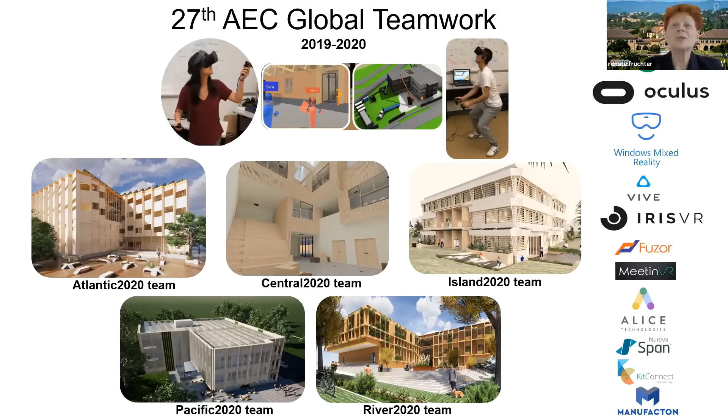All right, hello everyone. We are Team Central, and we are happy to be back on screen today showing you our new engineering facility building for the University of California in Los Angeles. First, let's introduce the main actors. Our team consists of Madeline, Anders, Kilian, Mo, Wenji, and myself, Thomas. And our owners are Vikash, Boris, Korish, Sohan, and of course our CEO and super owner, Renate.

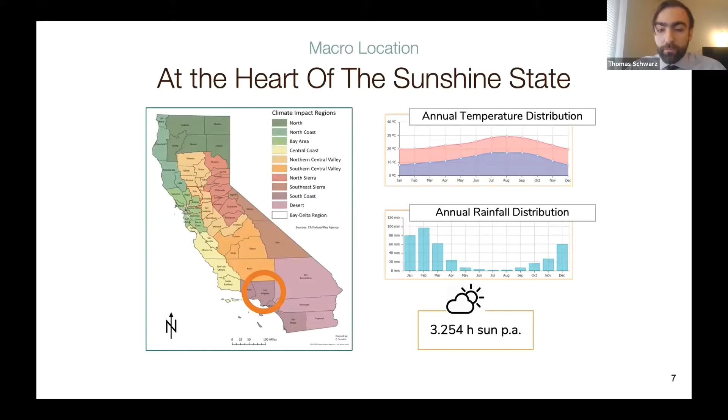Starting with the set of our production: our story takes place on the campus of UCLA in the heart of Los Angeles, California. Located in Southern California, the LA area has a year-round hot and dry climate. Rainfall is scarce, with virtually none over the summer.

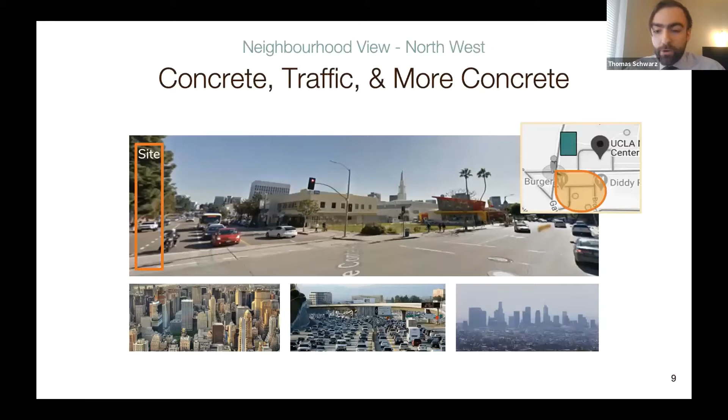Our site represents the southwestern entrance to the UCLA campus, surrounded by residential areas to the west, commercial areas to the south, and a hospital in the direct neighborhood to the east side.

Further investigation shows the very gray concrete surroundings of the site, along with the very busy traffic characteristic of Los Angeles. Considering the site characteristics, a resilient design from the engineers was required to account for the challenges of a high seismic zone, the Santa Ana winds, and water shortages resulting from the hot and dry climate. A tight site, noise-sensitive neighborhood, and busy traffic patterns were obstacles for the construction managers to overcome.

The urban concrete surroundings were actually seen as an opportunity to exploit by the architect, as the team aimed to produce an iconic building that stood out at our owner's request. In the winter quarter, we developed two big ideas, the palm tree and the cradle, aiming to integrate disciplines, build sustainably, and meet owner preferences. A combined team and owner voting resulted in choosing the cradle design with a timber structure, which scored high in environmental sustainability and architectural design.

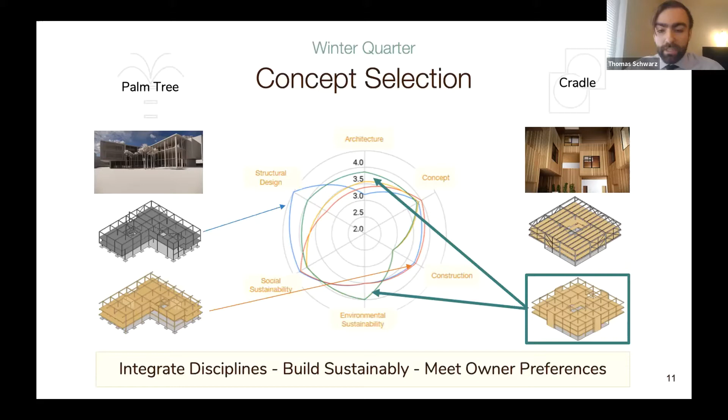Time to get excited for the cradle.

The chosen concept addresses one of the biggest challenges of our present and future. Massive amounts of waste produced by excessive consumption and linear material use is resulting in unfavorable conditions for both planet and people, and puts our future in danger.

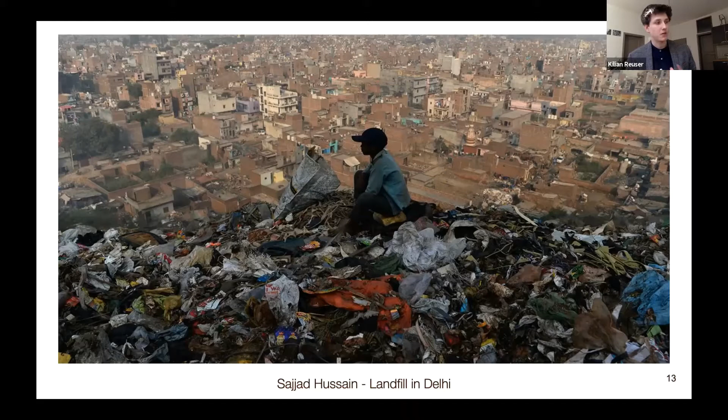There's no choice but to reconsider our actions, big and small. With this concept, we aim to contribute to challenging linear thinking for the sake of humans and nature. Our big idea of the cradle is to design and plan a building that reconnects people and planet, focusing on the needs of users while moving from linear material use to circular thinking, ensuring that our building is prepared for the future and its challenges, and offers an attractive learning environment at UCLA.

This year's challenges have helped us further refine the big idea and adapt different perspectives to user well-being and circularity. Designing for resilience addresses both the building, the integration of the occupants, and resource efficiency in circular construction to be prepared for future changes and challenges. We assessed how prefabrication could help us deliver a high-quality circular building, and integrated different softwares and processes to back up our design choices with more informed and quicker decisions.

With this said, welcome to the cradle.

The cradle presents itself as an introverted building, blending in with the color scheme of the surroundings, while at the same time attracting public and students with its playful facade scheme.

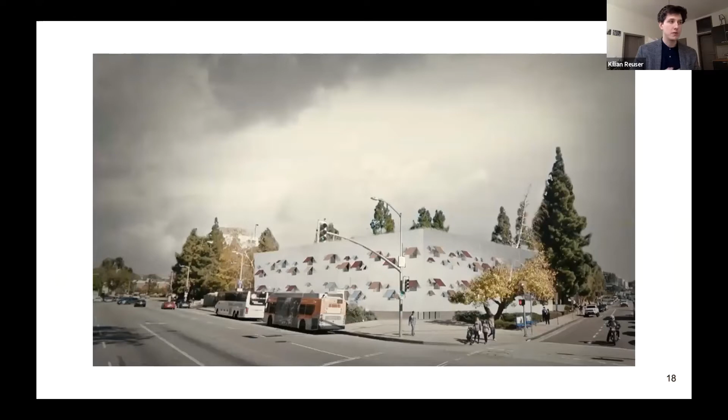Being located at the edge of the campus, the building orientation and concept design was guided by the flow of people and the innate ability of the double square footprint to have a central meeting space.

We wanted to create a welcoming meeting point both inside and outside the building, featuring a big atrium and a green plaza around the building. The plaza is a much needed green area, contrasting the concrete surroundings, placing the cradle in a welcoming, inviting setting.

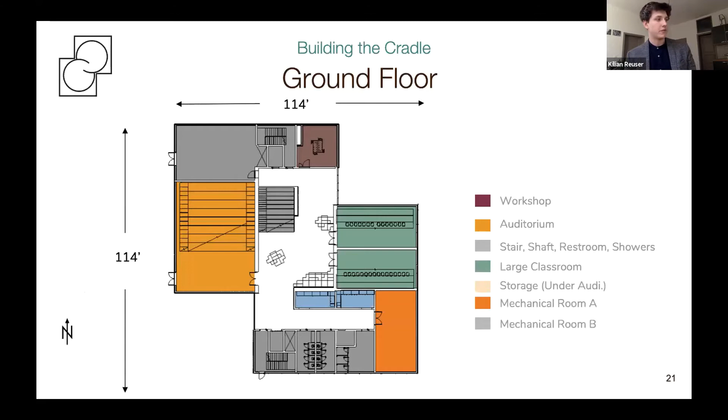Upon entering the building, visitors and students find themselves in the big atrium on the ground floor, from where they can also access the auditorium and two big classrooms.

The building truly opens up from the inside, creating a homely feeling for students, staff, and visitors, reminiscent of a small village. It inspires interaction and innovation through visual connectivity, forming a kind of internal village of different levels, and makes a bold design statement with the cantilevered study spaces on the upper floors.

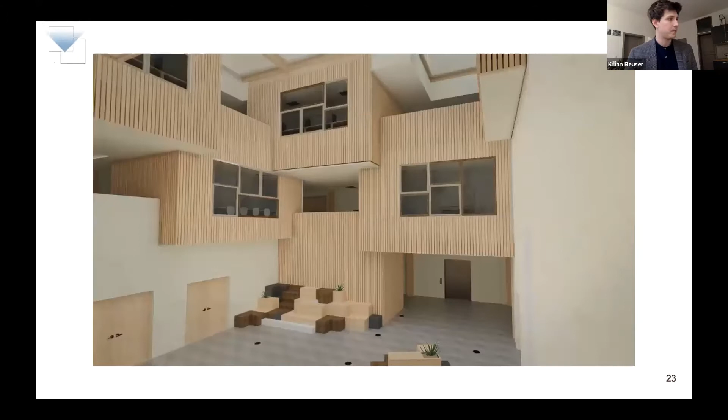The atrium is designed for acquisition and appropriation, inviting occupants to make the space their own with flexible furniture. It also showcases circularity in a very tangible way, using recycled or renewable materials such as newspaper wood or recycled windows on the cantilevers.

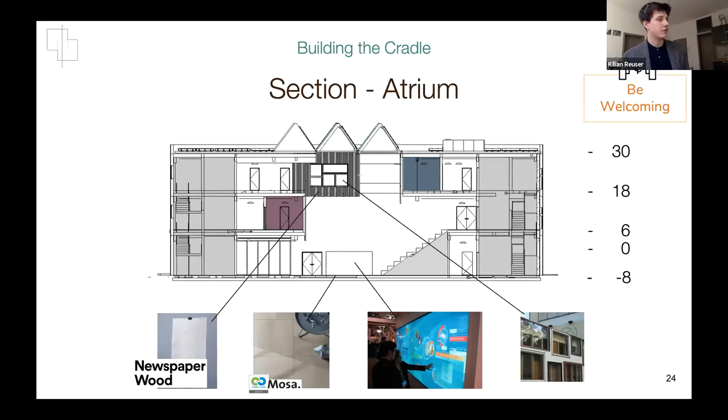Engaging discussions about building performance and circular energy usage through an interactive smart wall is also part of the atrium. The smart wall informs users of our current resource consumption in the building and the latest circularity research findings. The second biggest entity next to the atrium is the auditorium, spanning two floors, since the aim of circularity demanded as little concrete usage as possible.

The backside of the auditorium on the first floor can be separated by a moving wall, allowing flexible use of the space, whether as part of the auditorium or as a classroom. The first floor in general accommodates learning spaces such as classrooms and seminar rooms.

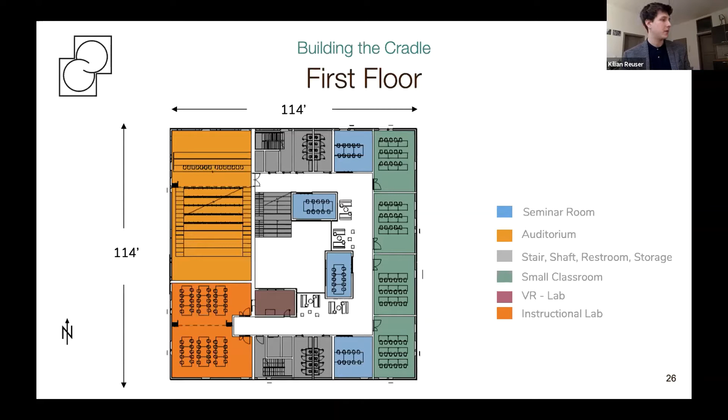On the upper floors, we additionally understand the corridor as an opportunity to foster collaboration and exchange in the student body. We therefore include breakout spaces that look into the atrium, not only providing visual connectivity throughout the building, but also a stellar view into the iconic atrium.

On the second floor, we accommodate more faculty and staff, providing a more work-like and quieter ambience. Here also the breakout spaces underneath the skylight form an interesting play with the corridors and niches for interaction and collaboration.

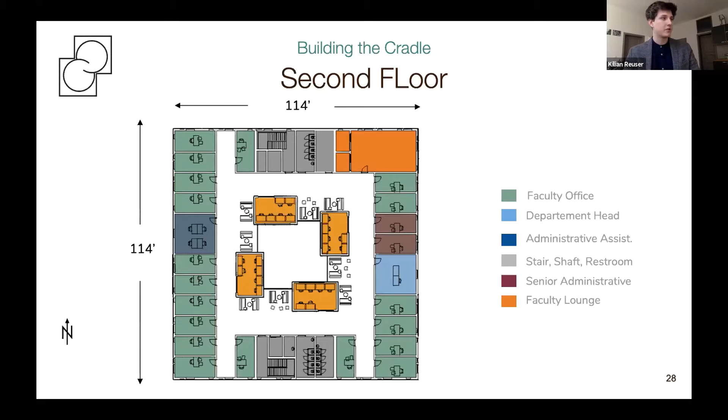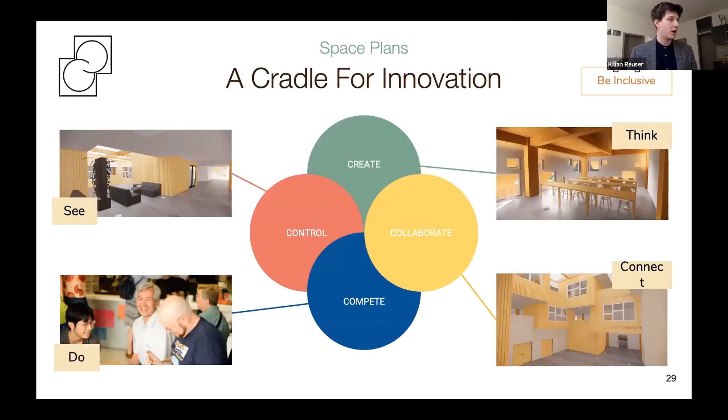With its concept, the cradle is truly inclusive, providing learning and workspaces for all different kinds of personalities. Whether a student or staff member feels more comfortable in personal interaction with others or needs quiet learning spaces, any option can be found in the building.

Beyond the learning spaces, the building engages occupants to contribute more to circular thinking, for example by participating in a workshop in a repair room on the ground floor, or an interactive playful waste collection system on the site.

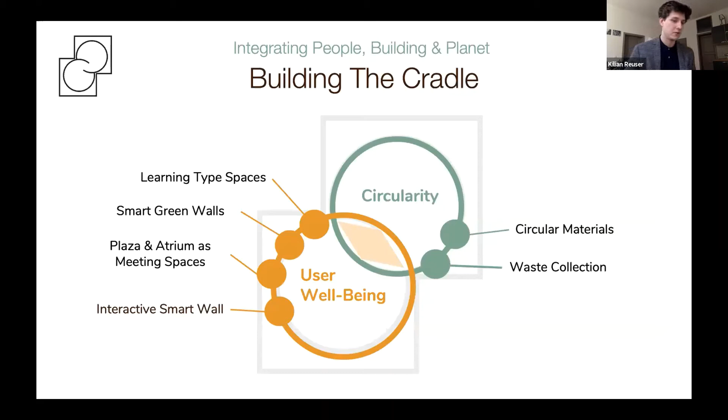Overall, the architectural design provides different spaces for an optimal learning and working experience, realized in a resource-efficient way with innovative materials. Now on to the structure of the cradle.

Together with the architectural vision, the seismic activities in the LA area were key drivers of our structural system design. Using ASCE 7-16 and USGS, site parameters were investigated and it was determined that the seismic design category is Category D. With these determinations, we were able to define the design response spectrum as shown on the slide.

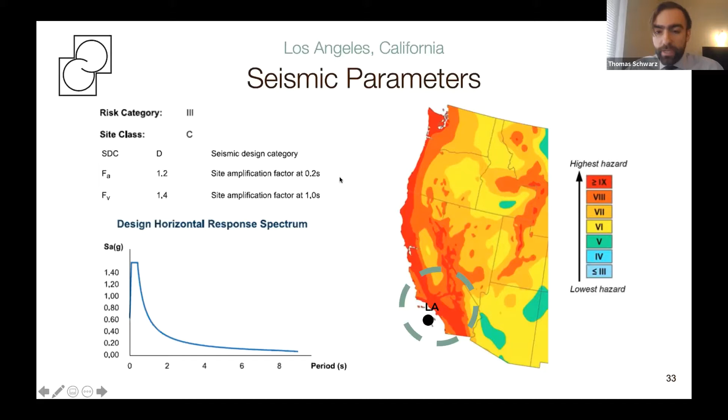Engineered timber was selected as the main structural material to achieve goals of sustainability for its low embodied carbon and prefabricability for its lightweight properties. The framing system for gravity loads consists of CLT panels supported by glulam beams and columns, which transfer the load to a reinforced concrete substructure. The lateral resisting system consists of CLT rocking walls, a resilient design which will be explained in detail later. For support of the cantilevered areas, steel timber truss systems were selected.

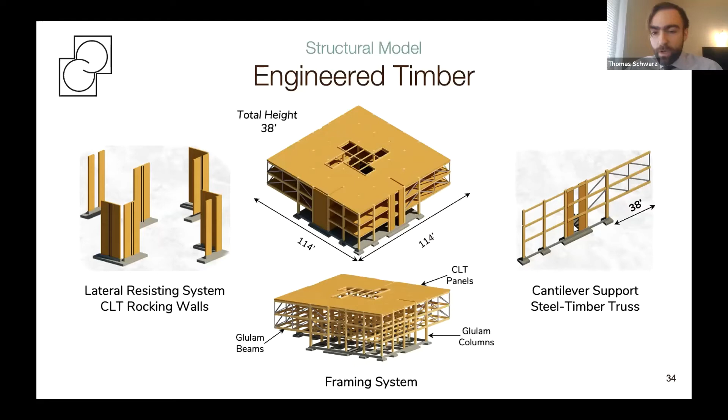Using the determined design live loads, RFEM was used to design and check cross-section capacity of both timber and steel members.

Looking at the framing plan, the building's substructure consists of a 6-inch concrete slab on grade with isolated footings. For the first floor, the framing consists of glulam columns and girders following a regular 19-foot by 19-foot grid with intermediate glulam beams mid-span the girders.

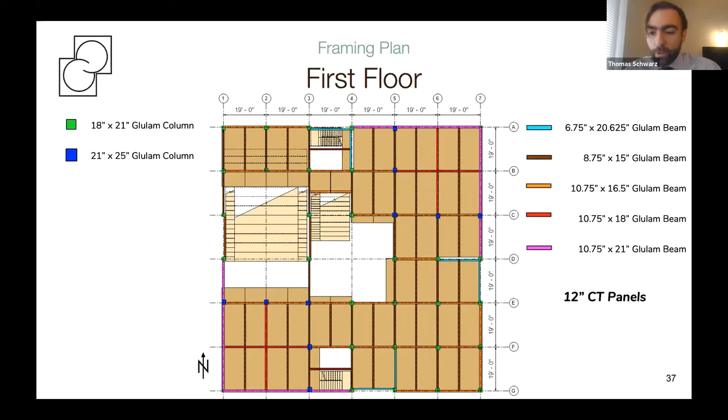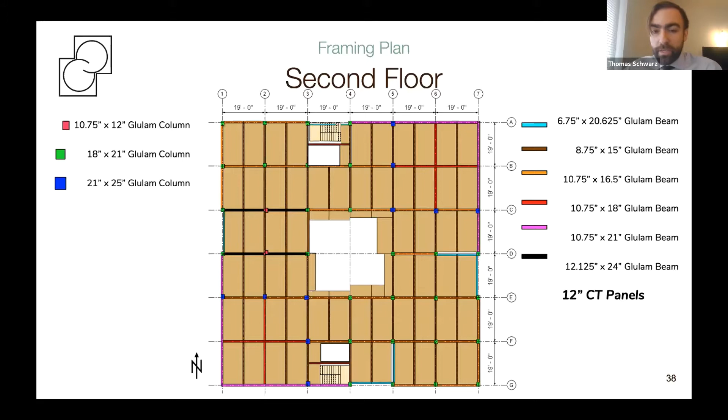The second floor follows the same grid and arrangement, however with deeper and wider girders above the auditorium to accommodate the longer span. The framing of the roof consists of thinner beams of less depth to optimize material use, since live loads do not apply to this level as they do on the first and second floor.

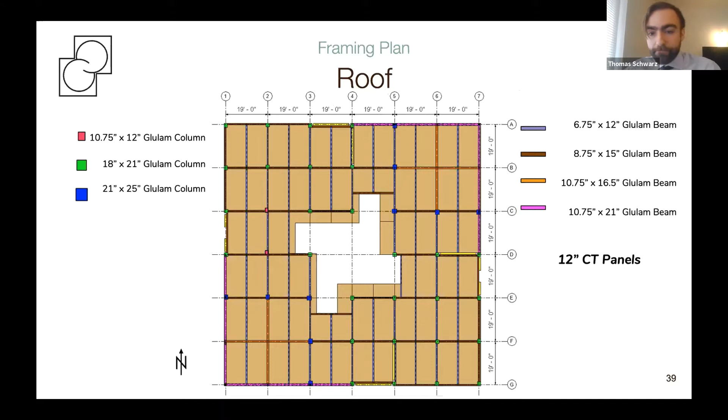RFEM was used to verify the cross-section capacity of the steel truss supports and the serviceability of the cantilevered areas. Using HSS 8x8x3/8 steel members for the truss, we were able to achieve an impressive acceptable maximum deflection of about half that of the allowable.

To support easy disassembly without compromising structural integrity, we opted for bolted connections rather than welded for both steel and steel-timber connections within the cantilevers.

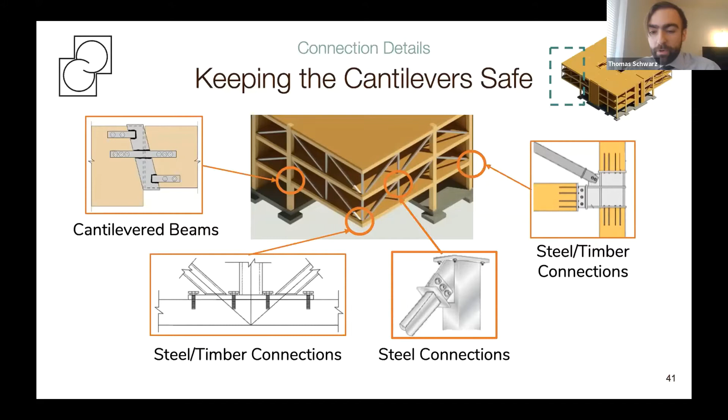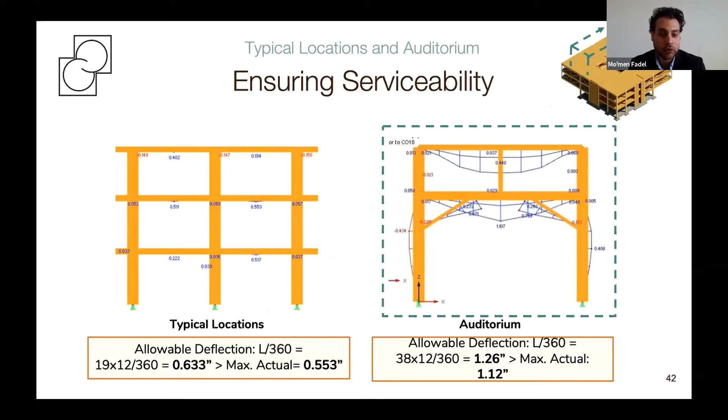Cross-section capacity and serviceability were verified for all timber members. Diagonal supports were added in the auditorium to decrease beam depth, ensuring views from the back rows were not obstructed.

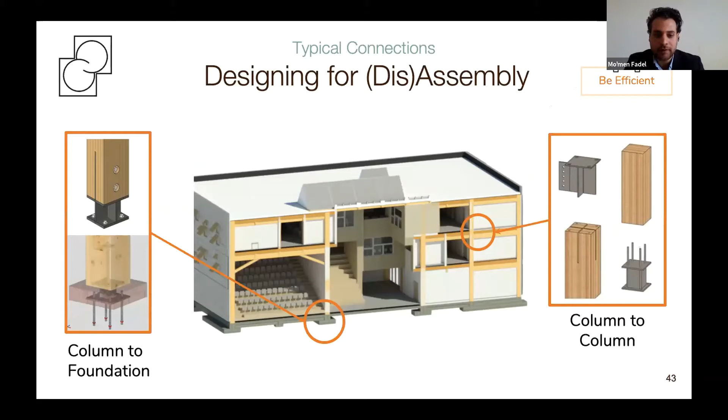Following the idea behind cantilever connections, typical connections between different elements were chosen to be easily assembled and disassembled to support the circularity and cradle-to-cradle concept behind the design.

To ensure the safety of the building during earthquake events, ETABS was used to define all the relevant seismic parameters, considering both the design basis and maximum considered earthquake.

The deformation is limited to the fuses rather than the frame, which can be easily replaced after a seismic event.

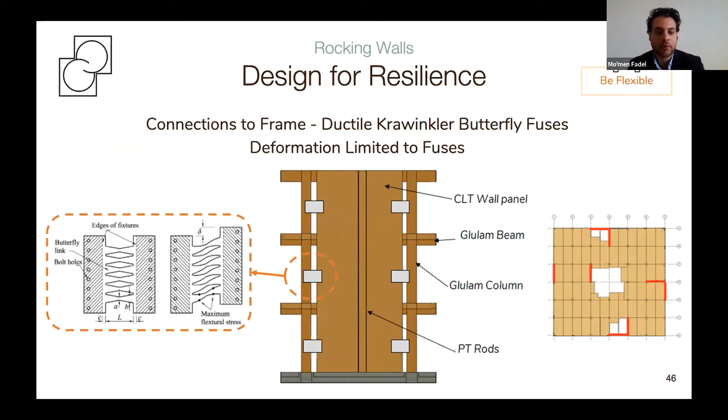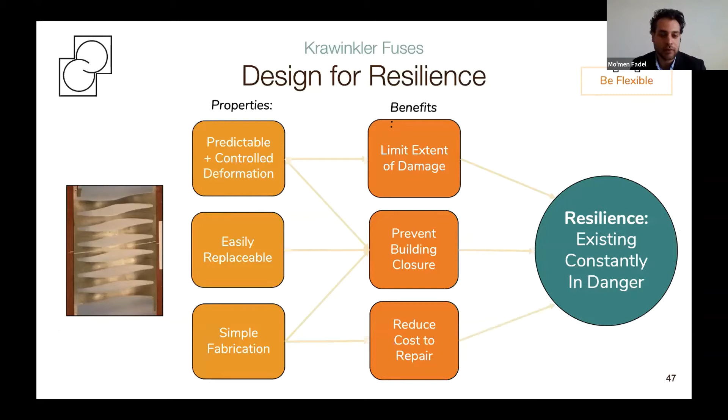Krawinkler fuses support resilience in our structure design, as they can be explained in three major features: deformation control, easy replaceability after damage, and simple fabrication. These mentioned features help in limiting the extent of damage, preventing building closure, and consequently reducing the cost of repair. These benefits all support the idea of resilience.

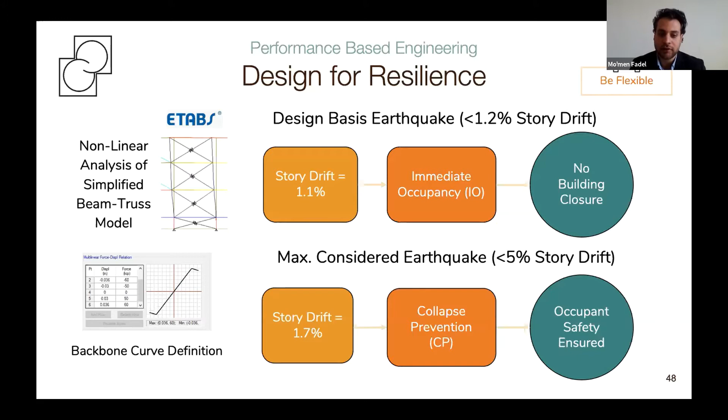In terms of performance-based engineering, rocking walls with Krawinkler fuses were tested in ETABS nonlinear analysis through a simplified beam truss model. Testing for a design basis earthquake, immediate occupancy criteria was met, meaning the building would not require closure after such an event. Testing for maximum considered earthquake, collapse prevention criteria was readily met, ensuring the safety of occupants in such an event.

Revisiting the big ideas behind the concept, earthquake resilient design ensures user well-being at any time. Timber materials and bolted connections designed for disassembly support circularity.

From the MEP perspective, we looked into making the energy and water supply more circular and designed an efficient, adaptable ventilation system that reduces energy consumption while also increasing user control and well-being.

The energy for the building will be produced by solar panels on the roof and skylights. The cradle works as a microgrid concept with large flow batteries that can provide power when there is no production from the PV panels. It also allows for maintaining electricity for essential needs of the building for an entire week in case of an electricity failure.

As a backup, the microgrid is connected to the UCLA grid.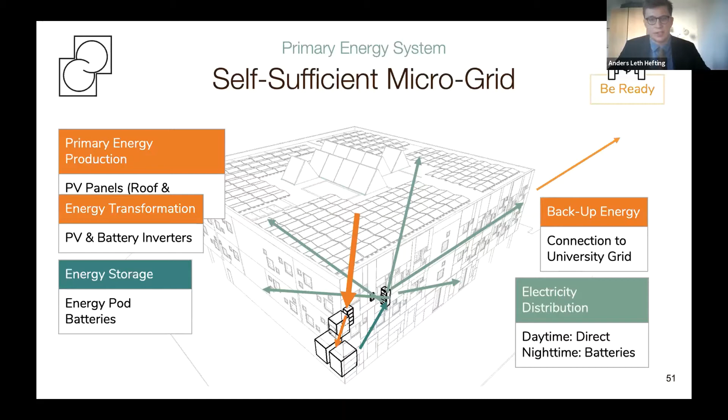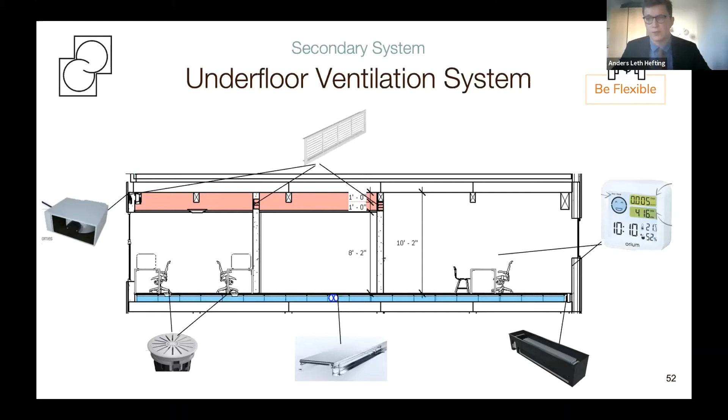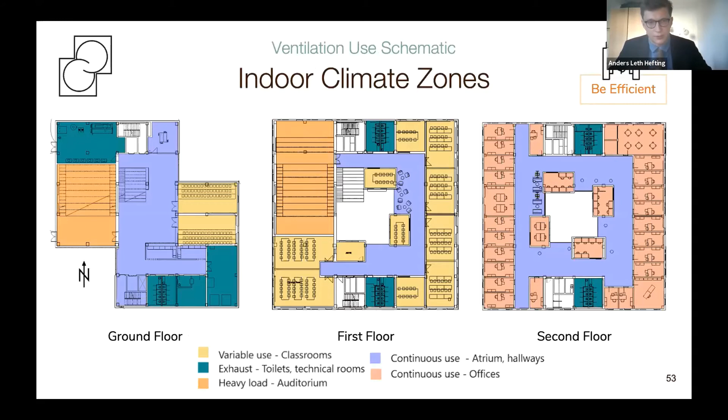The MEP and electric utilities rooms are located at the ground floor level in the northeast and southeast corners. The atrium and classrooms are ventilated actively along the building envelope and passively by dampers in the center.

On the second floor, the underfloor supply is ducted with outlet dampers into each classroom and meeting room to enable local control where needed. The perimeter is conditioned by convection units.

On the third floor, the supply plenum is not subdivided and it has a constant low air pressure throughout the underfloor. The supply air into the perimeter offices is controlled by the convection terminal units, which can cool and heat air locally as desired by office occupants.

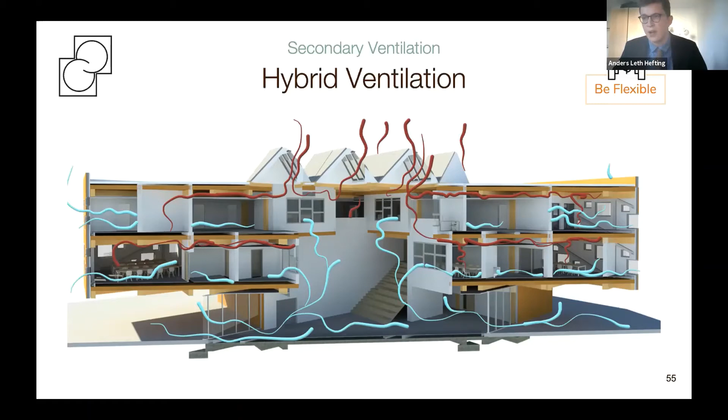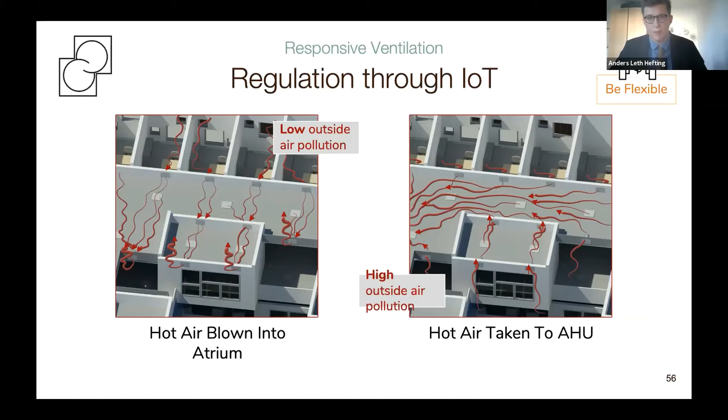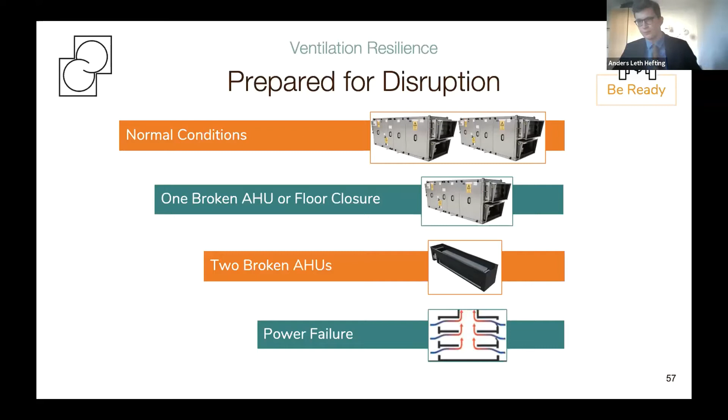The service design hence enables both circular use of resources and energy, as well as a high degree of occupant control and a system that is able to respond to different scenarios.

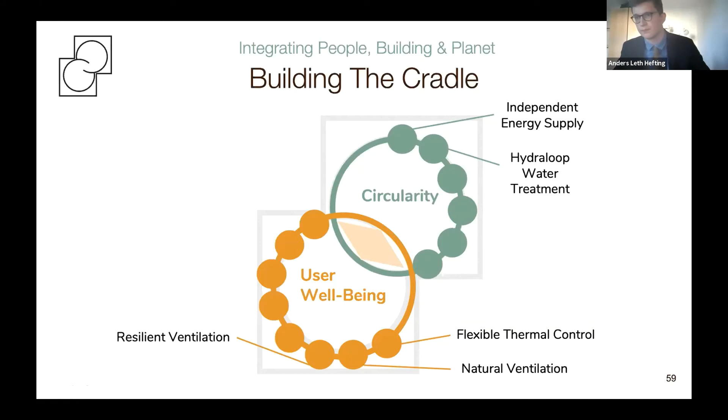The individual solutions were all guided by the pursuit of circularity and user well-being, but only the integration of different disciplines allowed us to truly take this ambition to the next level. A lot of team effort was focused on the facade and the atrium, creating an inviting, iconic building from the inside and outside, and we will look into these considerations more in detail in the following.

How do we propose an iconic facade solution? The design of the facade was characterized by several iterations to balance structural safety and architectural design. The construction managers also had a say in the design process, pushing for high standardization to enable prefabrication and disassembly, a shorter construction process, and cost-efficient circular material choice. On top of that, an efficient, simple shading solution had to be found.

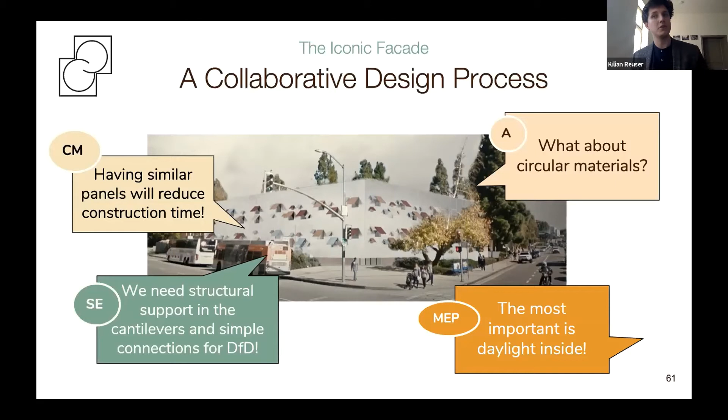Awnings from recycled sails are a material-effective shading solution. It is traditional, but allows for individual operation for each window to provide the desired daylight amount for each room. The awning solution was examined using Iris VR, and only a small amount of the low winter sunlight enters the southeast-facing classroom at both 9 a.m. and 3 p.m.

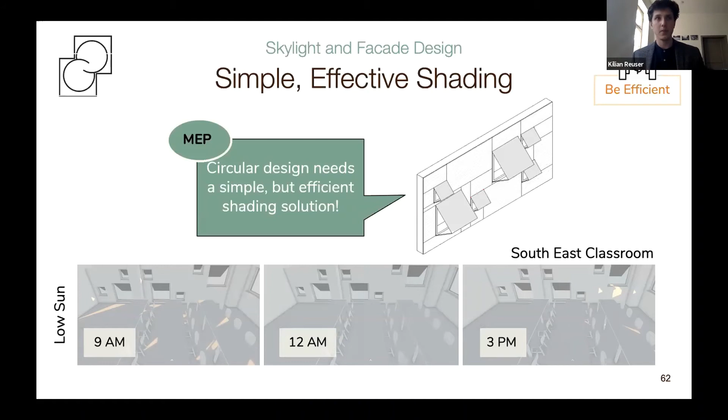The result of these cross-disciplinary efforts were 5 different facade patterns, which still make up a playful, interesting facade pattern, but at the same time enable a learning curve for efficient installation as well as easy disassembly.

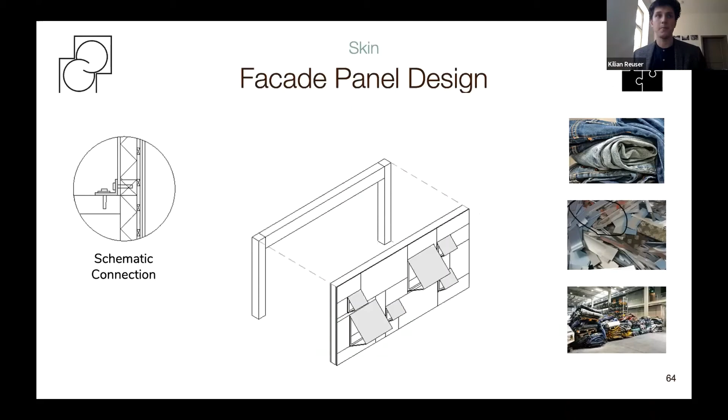The disassembly of the facade is further supported by the design of connection details that connect the panels to the structural frame using screws. A big factor to determine the level of circularity was the facade material. Finally, we chose recycled aluminum, which has outstanding appearance, good thermal properties, and isn't too expensive.

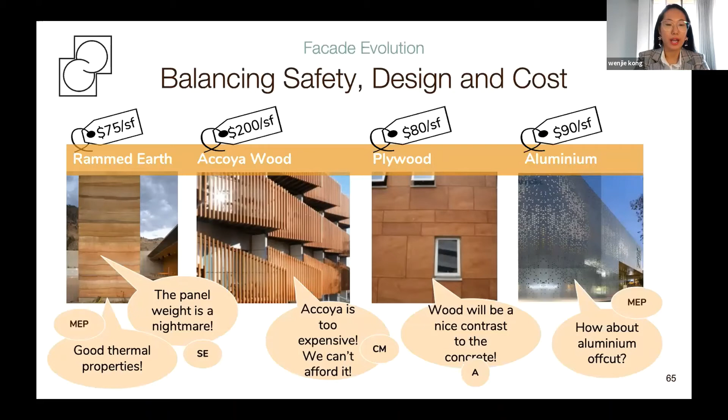Having determined the layout of the panels, we evaluated the construction process. The biggest facade panels are about 20 feet long and 11 feet wide, since the most prevalent truck width is under 12 feet. This is the heaviest architectural element, thus it determines our mobile crane capacity. Here is the just-in-time delivery and installation process for our facade panels.

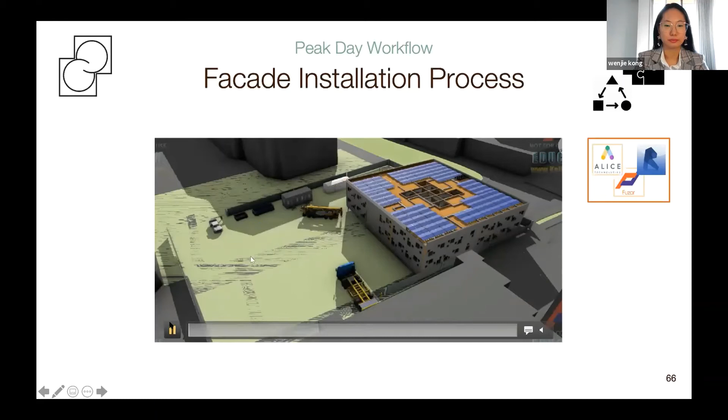Here is the KPI diagram for facade panel installation, including truck unloading the panels to the material laydown area. The upper control limit is 60 minutes, and the average installation time is 46 minutes. Thus, we can install 8 panels per day, and the facade installation will take 3 days per floor.

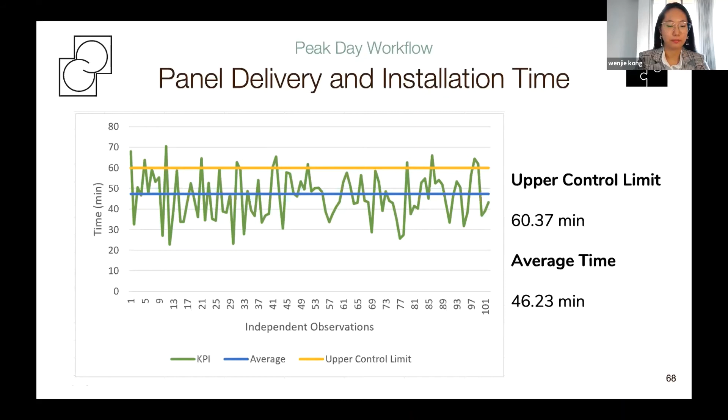Overall, the facade plays a key role in achieving our big idea implementation.

The focus of discussions was the atrium, our key design feature on the inside. Creating an inviting meeting space for occupants and visitors in and around the atrium is a central part of the user well-being goal. Realizing the architectural design has particularly affected two areas: skylight design driven by the MEP and SE engineers, and the construction of the cantilever learning space on the upper floors driven by the construction managers.

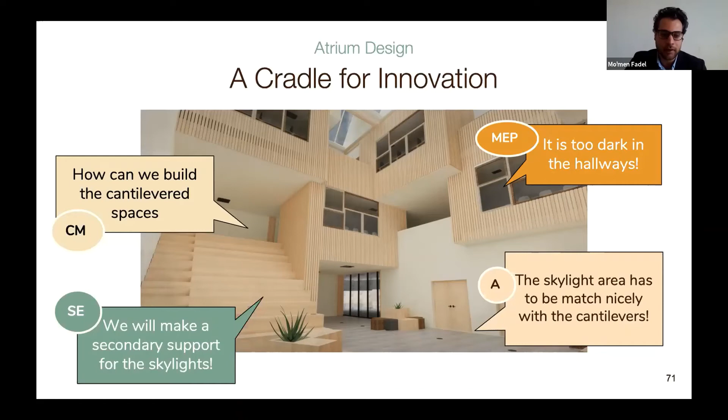The initial skylight design following the standardized grid wasn't very pleasing from a design perspective, and also resulted in a lot of areas with insufficient daylight on the upper floor.

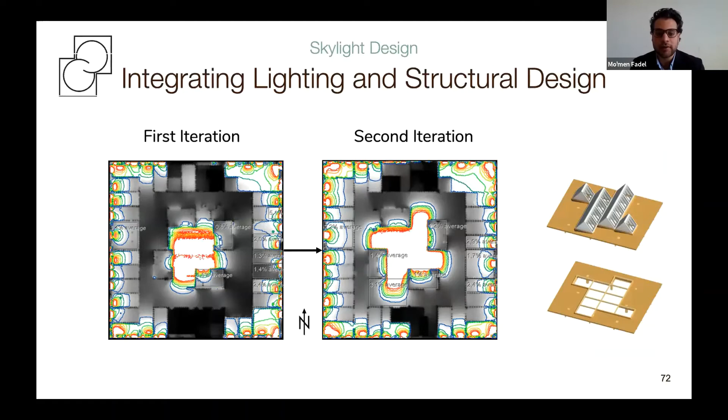Elevating a skylight support structure above the rest of the roof frame enables the skylight to be placed centrally in the atrium, wrapping around the boxes into the breakout zones. This provides twice the amount of daylighting for the interior boxes and hallway spaces.

Madeleine, I believe you're muted.

Sorry. To bring the atrium to life, the construction strategy also had to be evaluated, with a particular focus on the cantilevered spaces. While the owners are mostly interested in getting a high-quality building on time and budget, the construction managers saw a number of risks and challenges that need to be mitigated to achieve these goals.

In order to get a better understanding and an overview of the potential risks, we created a risk matrix with the team, brainstorming questions such as what can happen, when can it happen, and why? Who is going to be affected and for whom is it a risk? Then for several building parts like the facade and the atrium cantilevers, we looked into how prefabrication could help us handle the risks in order to avoid safety and logistics issues and save cost and time.

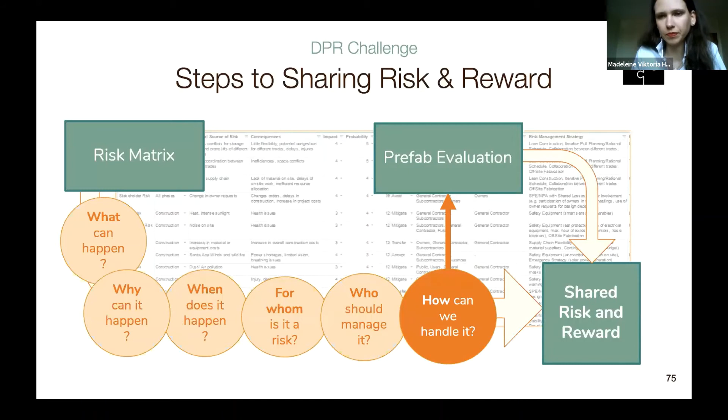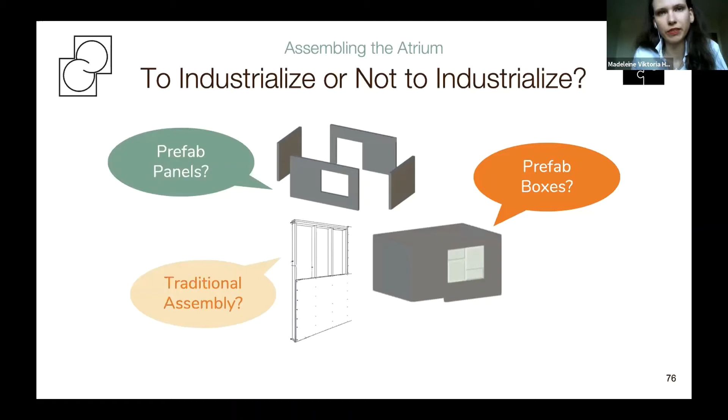For the atrium cantilevers, we looked into three different solutions: traditional assembly, prefab panels, and prefab boxes. There are several logistics and safety risks related to this construction process, affecting a range of stakeholders that all share an interest in mitigating them.

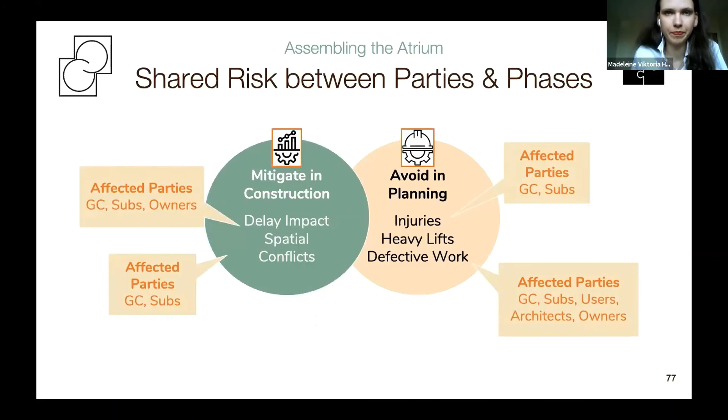Looking into safety first, the goal here is to avoid injuries, heavy lifts, and defective work. We evaluated the work steps that need to be performed on site and the component dimensions. While the traditional assembly poses the highest risk in terms of injury and defective work, the prefab boxes are rather heavy and big elements that need to be lifted.

The prefab boxes also require a larger truck that will come with additional costs and transport safety implications. From the safety perspective, the panels hence seem to be the preferred option.

Going deeper into logistics risk, we also wondered how the sequencing and installation time would affect the risks of delay and spatial conflicts. While single elements and panels can be installed during interior works in parallel with other tasks, prefab boxes will need to be installed during the structural erections.

Using prefab panels allows us to better use the crews on site and reduces the risk of schedule impacts in case of material delivery or construction delays.

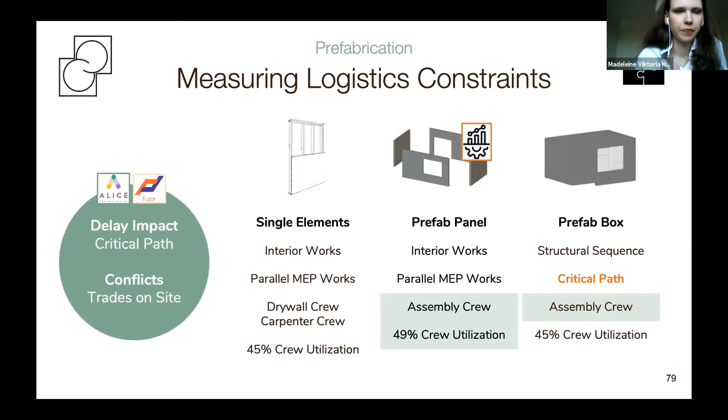But what are the rewards of the different solutions in terms of time, schedule, and quality? Using different models and analyses to assess the options, it is suggested that the prefab boxes will be the most time and cost-efficient solution. However, installing them during the structural sequence leaves the sensitive newspaper wood cladding that we chose exposed to pollution and sun.

Therefore, to ensure high quality without changing materials, it seems not advisable to opt for the prefab box solution. We decided to choose prefab panels and instead looked into how we could improve the baseline schedule that we use for comparison.

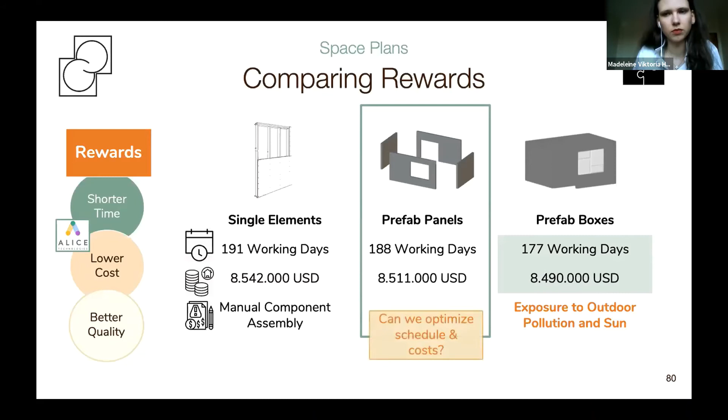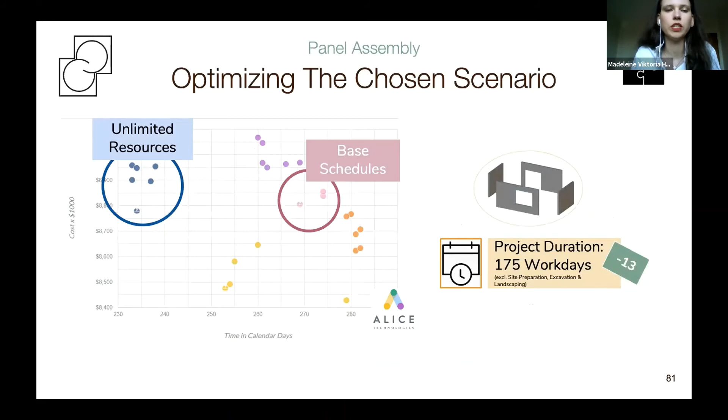Adjusting the crew sizes in the interior work sequence, we were able to shorten the estimated construction time by 13 days while simultaneously reducing the costs. With these collaborative effects, the atrium makes up a true center of user well-being and circularity in the cradle as well.

Then, how can we construct this truly iconic building safely and efficiently? Our answer is always safety first. Our construction planning was guided by safety considerations to provide a safe workspace without disrupting the public. We used the risk matrix mentioned earlier to design a safety concept, addressing both the daily safety measures on site

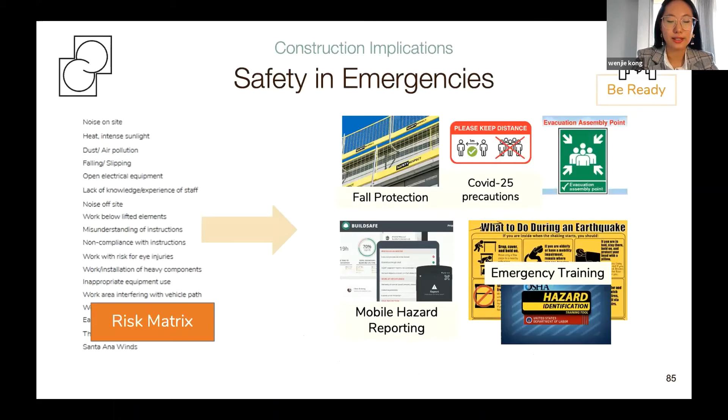as well as the responses to emergencies and challenges such as the COVID-19 pandemic. Planning the site logistics, our main entrance and exit for heavy transport is on the west side to avoid the noise impact on the hospital to the east. In addition, we'll use a noise blocking wall as our temporary fencing.

Since our site is very tight, we'll rent additional site offices across the street and use the visitor parking lot to the north side. In response to the COVID-19 crisis, we placed a hand washing station along with a site trailer and toilet on the east side.

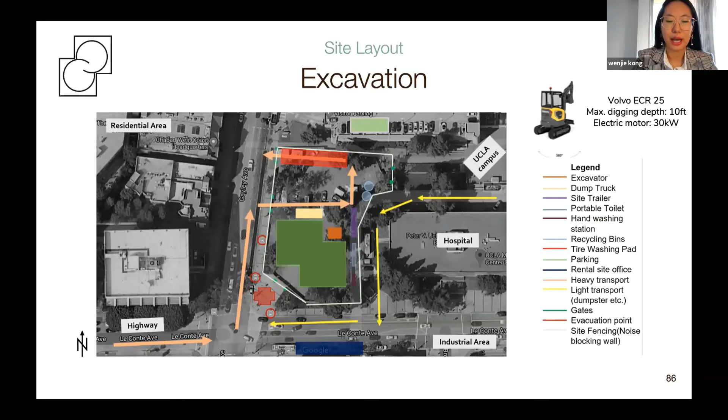During the excavation phase, the electric excavator and dump truck will be placed here, and the excavation process will take a week.

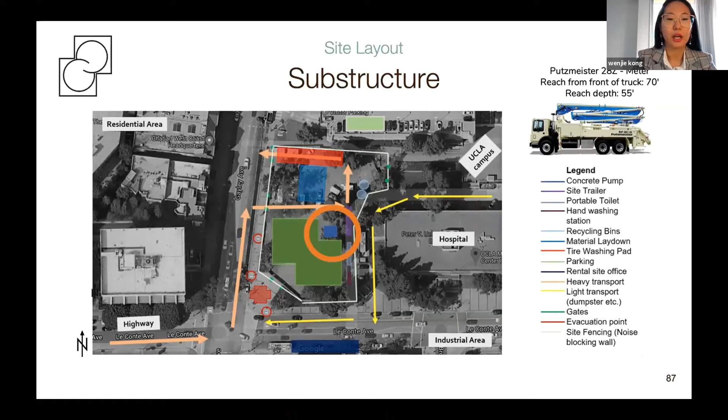For the concrete footings and slab on grade, we use a Putzmeister 28Z type concrete pump. According to its capacity, we expect to finish the substructure part in 40 days, including curing for the concrete. Our heaviest architectural element is the prefab facade panels, which weigh 27,000 pounds. As a function of the heaviest and furthest lift, we pick a mobile crane, whose radius is 130 feet. During the substructure erection, it will have 2 locations.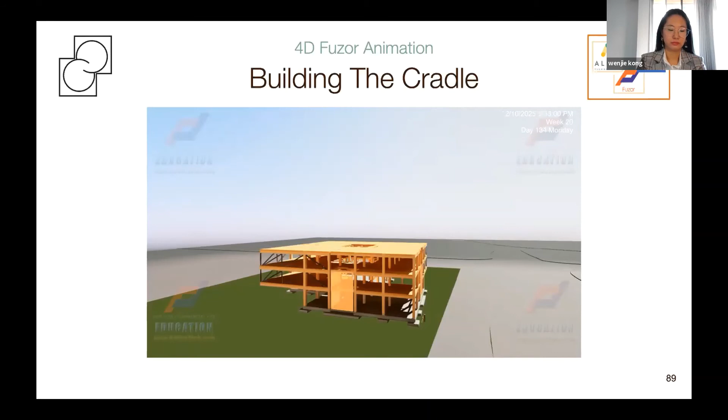As for the construction time, our baseline schedule in Microsoft Project has a total duration of 253 workdays, lasting from September 30th, 2024 to September 17th, 2025. But after exploring different scheduling options and the impact of prefabrication, we are able to shorten the project duration to 225 workdays, finished on August 8th, 2025.

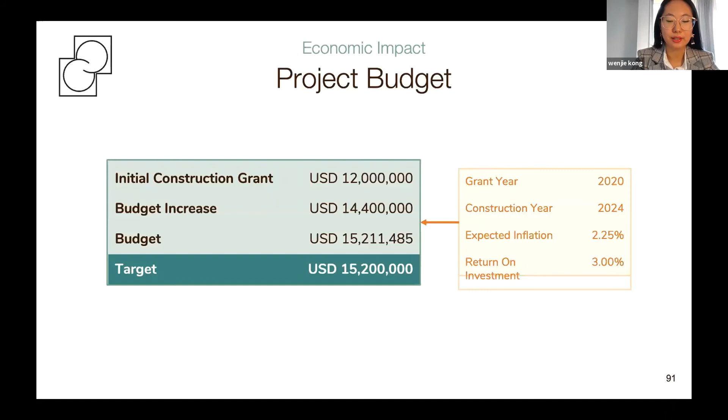For the economic aspect, our design justifies a 20% budget increase from the owners. After putting the initial $12 million into a 5-year deposit in UCLA foundations, we can have an annual return of 3%. So our overall target is $15.2 million.

The first chart is our target distribution for different assemblies after combining the data from the RSMeans historical database and our owners' preferences. The second one is the actual cost distribution. There are major increases in services and special construction assemblies, whereas decreased portions in substructure and shell.

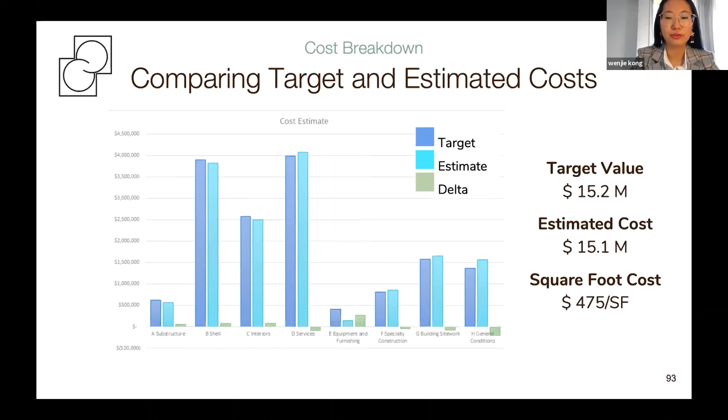The primary cost drivers are the underfloor ventilation system, which is over twice the price of the traditional overhead HVAC system, and the highly customized skylights, whose unit price is $300 per square foot. In a nutshell, our overall cost is within the budget and is about $475 per square foot. Our cost has evolved several times since the winter presentation, and we track them using data scripts

and the RSMeans database. This allows us to balance aesthetics, user experience, and cost efficiency.

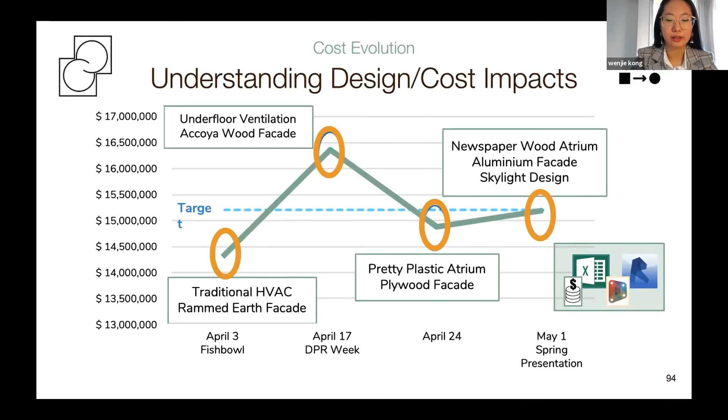Lastly, for our material procurement, we focus on national suppliers but we also try to trace the origin of key raw materials or components, like timber for structure and aluminum for facade. This allows us to anticipate potential delays quickly and react accordingly to ensure a timely construction for our cradle.

Let's look into the summary and statistics of our overall implementation of the big idea. Taking a step back and summarizing all the presented solutions, the cradle as a building reflects a clear focus on circularity and on user design.

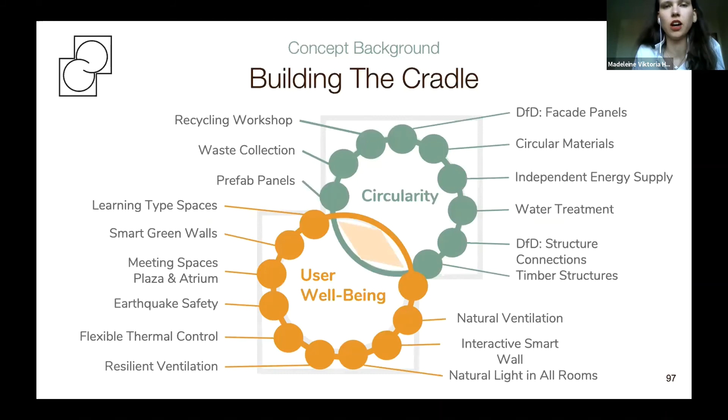This is also supported by the assessment we did of the building using the WELL rating for user well-being and tracking the circularity of the design choices. By continuously assessing the building performance through indicators of user well-being from the WELL certification standard, it was possible to make sure that the cradle achieves the best performance possible for user-oriented design solutions. In this assessment, we achieved 80 points, which qualifies the cradle for the WELL Platinum rating.

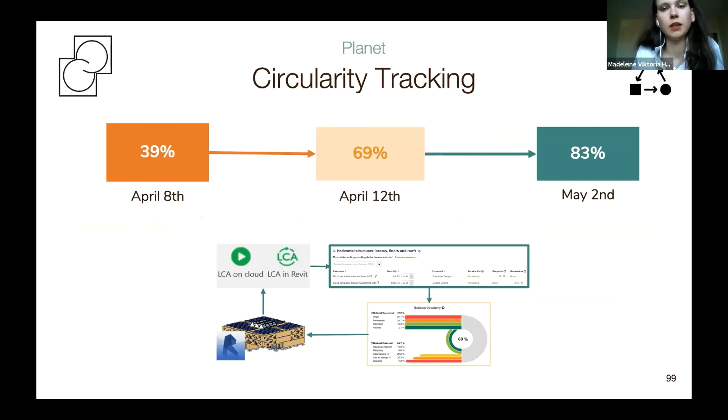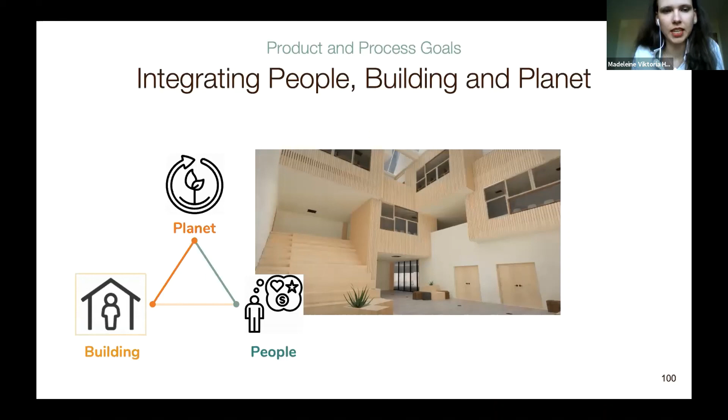To achieve the goal of high circularity, we investigated a lot of materials, some of which were shown during this presentation. Tracking the design evolution directly from Revit, linked to One-Click LCA, allowed us to identify the most significant material choices affecting our designs. This provided a detailed and comprehensive solution to engage the whole team in circularity discussions across multiple iterations. So today we can present the Cradle as a building that, by engaging all disciplines across architecture, structural engineering, MEP, and construction management, successfully combines circularity and user well-being in the new UCLA engineering faculty.

And now, ladies and gentlemen, it is time for the Oscar shortlists, highlighting the key points of how we addressed this year's challenges: resilience, shared risk and rewards, industrialization, as well as intelligent interoperability.

Let me present. Designing for resilience addresses the building, the occupants, as well as resource efficiency in circular construction. In order to thrive in the face of the unexpected and even extreme situations like earthquakes and power outages, we use rocking walls and energy storage while maximizing the amount of circular building materials.

We also keep in mind that encouraging building occupants for innovative thinking is a key part of being ready and efficient. Thus, our building has functional spaces such as an atrium and repair workshops to engage them.

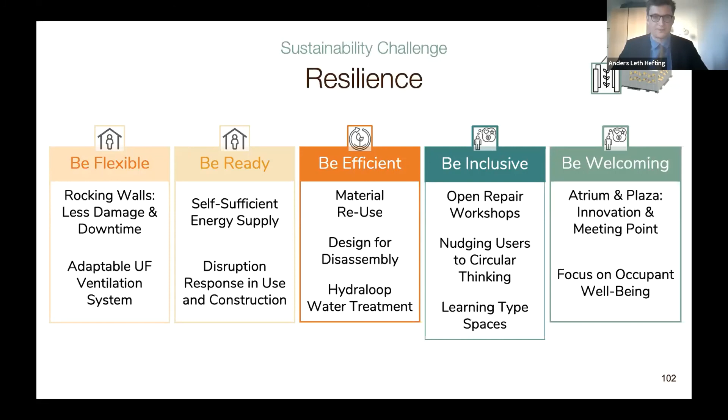To make suitable prefabrication choices, we use the risk matrix to brainstorm likely risks in planning, construction, and occupancy with the team, and describe their probability, impact, and consequences for different parties. In order to reduce the risks we found, we then evaluated whether different prefabrication options would allow us to better handle safety and logistics challenges using ALICE and Fuzor.

We integrated different software and processes to support our design choices with more informed and quicker decisions for process, product, and organization. Linking the Revit model to One-Click LCA allowed us to achieve a 44% increase in circularity by tracking the use of recyclable materials. These, to a large extent, guided our design iterations.

Visualizing constructability in Fuzor and validating the baseline schedule in ALICE, we better informed the designers from the very beginning. For example, we determined the dimensions of components that can be safely delivered and installed. Also, ALICE helped us identify optimal construction sequences, which resulted in a time saving of 28 workdays.

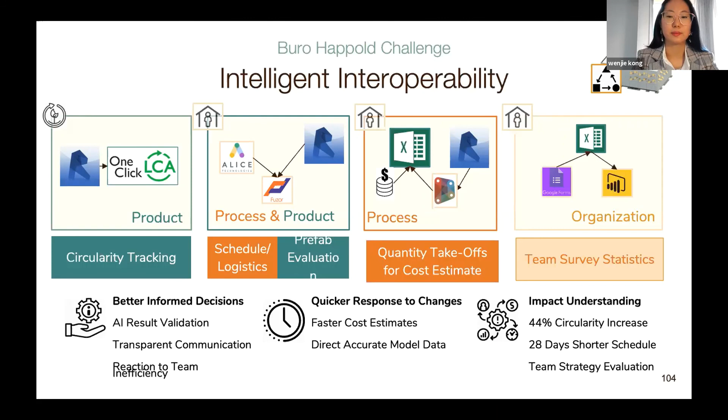So let's look behind the curtain to see what led to the creation of this masterpiece. We will now share some insights into the collaboration of the last four and a half months in Team Central.

To overcome discipline silos and time zones and bring our building to life, we established a variety of structures and practices for our teamwork. We use different IT tools to support collaboration, coordination, and communication among team members and with the owners. In the spring quarter, dedicated discipline days, as well as increased team-wide use of Slack and Asana, helped us improve transparency, response time, and feedback significantly. The analysis of our weekly team survey confirmed the very positive impact of these strategies.

Overall, a typical week looked like this. We met in different contexts using Zoom and VR, and had a clearly structured week with discipline days and daily sub-meetings, as well as weekly team meetings on Sundays.

We use VR for different scenarios to enhance our experience and understanding of the design and planning across all disciplines. In sessions of on average 30 to 45 minutes, it helped us get a better spatial understanding, immediate feedback, and also created a joint experience.

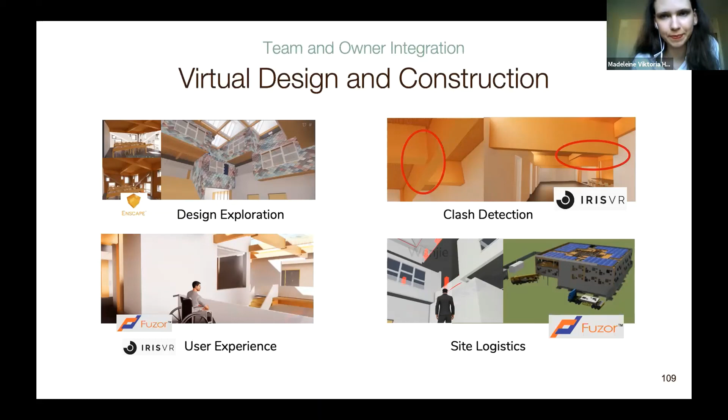Overall, the project offered us a tremendous learning experience that we loved to embrace during the last couple of months. Long working hours, countless iterations, and sleepless nights were one part of the journey. But we had a great time in Team Central, hosting digital concerts, sharing Michelin-star dinner recipes, and playing mini golf in VR.

We're really grateful for the opportunity to be part of this course, and want to thank first of all Renate, but also our owners and the many mentors that accompanied our journey, shared their knowledge with us, and guided our work. Thank you.